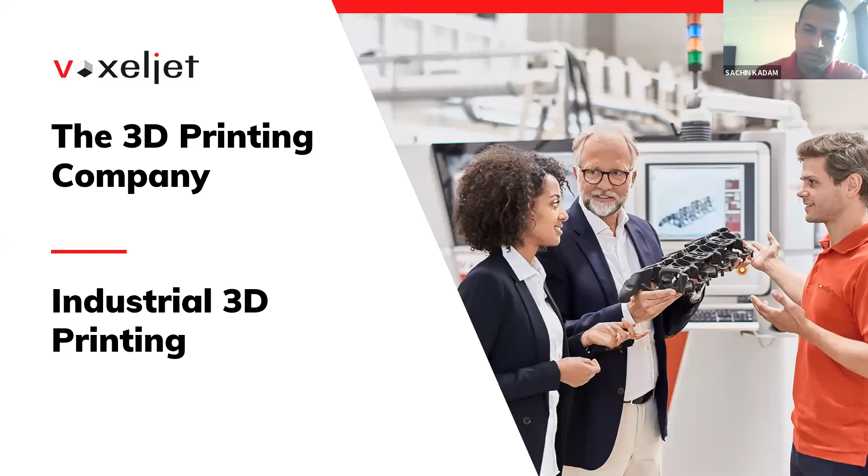We'll discuss the company today. I'll give a brief description about the company, the processes we use for different castings and different materials. We'll discuss different materials, and different systems we have for different applications. The services we provide to customers who don't have 3D printing machines and want to get our services, 3D printed parts - we print the parts for them and deliver it to them. And we'll also discuss a few interesting case studies from different customers.

So we are a 3D printing company founded in 1999. It started with 8 people, now we have more than 250 people in our company. The headquarters is in Augsburg, Germany. We also have subsidiaries in Detroit, USA, and in London, UK. We have offices in Pune, India, and in Shanghai, China.

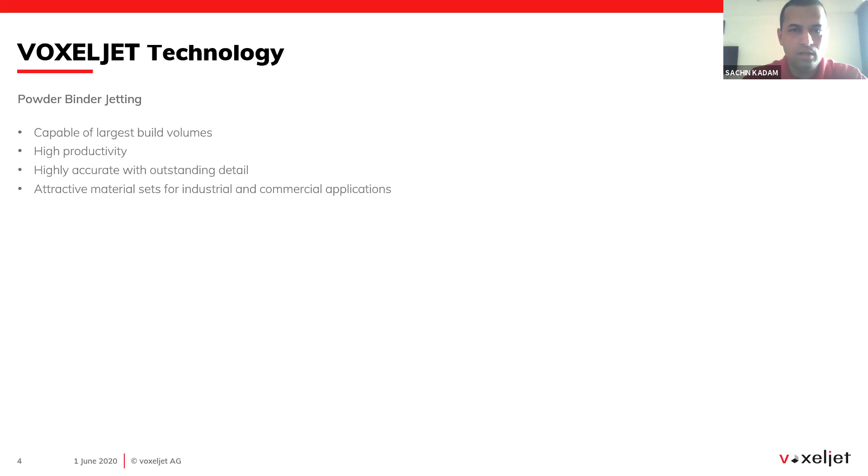The advantage of 3D printers is the printed parts are highly accurate. The tolerances are very low - the accuracy is around 0.2 to 0.4%. The details of the part are really great. We also have attractive material sets for different types of applications, including commercial applications.

Now the printing process - over the last couple of weeks you've all heard a lot about 3D printing technologies. The principle is basically the same for all 3D printers. You need CAD data first for a part, and then it is fed to the machine. The machine has a nesting software where you can slice the CAD data into 150 micron or 300 micron layers, depending on what kind of process you are using.

The CAD data is sliced, and on the machine the powder is recoated with the recoater, and after recoating the print head prints the data on the platform as per the layer data provided by the machine computer. These steps are repeated until the parts get finished. After the parts are finished, normally the job box is removed, and there is an unpacking station. We have to unpack the parts, clean the parts, and the parts are ready for further processing.

VOXELJET presents the chemical 3D printing process, powder binder jetting. The 3D printing process runs on all available VOXELJET printing systems with a variety of different particle materials, such as sand, plastics, or freely selectable powder materials.

The only requirement is CAD data of the part. The process starts with the application of the part material to the building platform by a recoater. Afterwards, the print head applies the binder selectively at the areas where the future part is to be produced, thus connecting the layers.

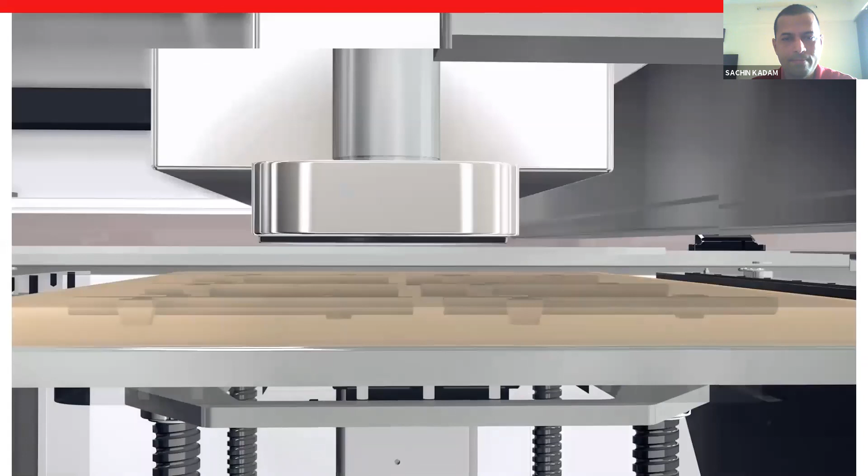After the binder has been applied, the building platform is lowered by the layer thickness. This process is repeated until the part is completely finished. The unprinted particle material is removed after the printing process. The models can be used directly for metal casting or as design and functional models without time-consuming post-processing.

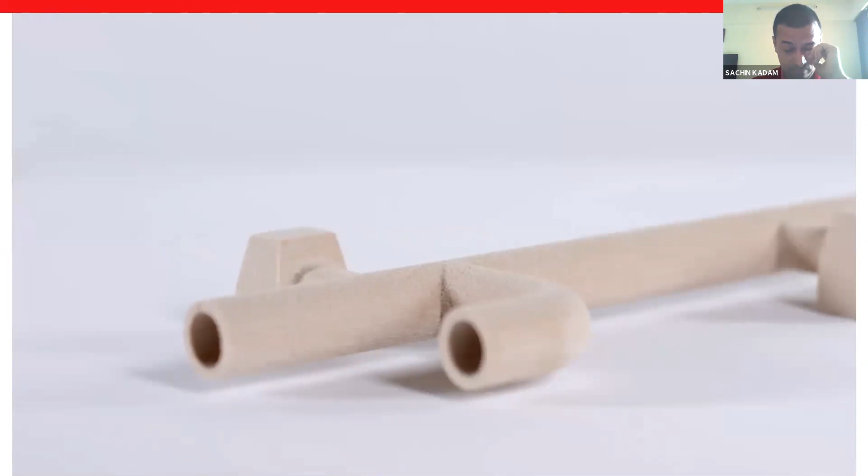We have different processes for 3D printing. One is the sand process. For the sand process, we use green sand or silica sand, where you can print the molds and cores, the negative of the pattern, and then in a foundry you can do metal casting from these parts. We have the largest industrial printer.

The build space is 4 meter by 2 meter by 1 meter. The resolution is really high, we print with 300 dpi resolution, and over 25,000 individually controllable nozzles. The printer has small nozzles from where it jets the binder.

The binder jetting technology is similar to the printers you have at offices or home, inkjet printers. It prints through these nozzles according to the CAD data provided.

Basically, like if you have a PDF file of 100 pages and you print those 100 pages on a basic office printer, similarly here the CAD data is sliced and it generates a number of pages. It's similar, like 150 micron or 300 micron layers are generated, and it generates 600, 700 layers depending on the size of the file, and then it prints layer by layer.

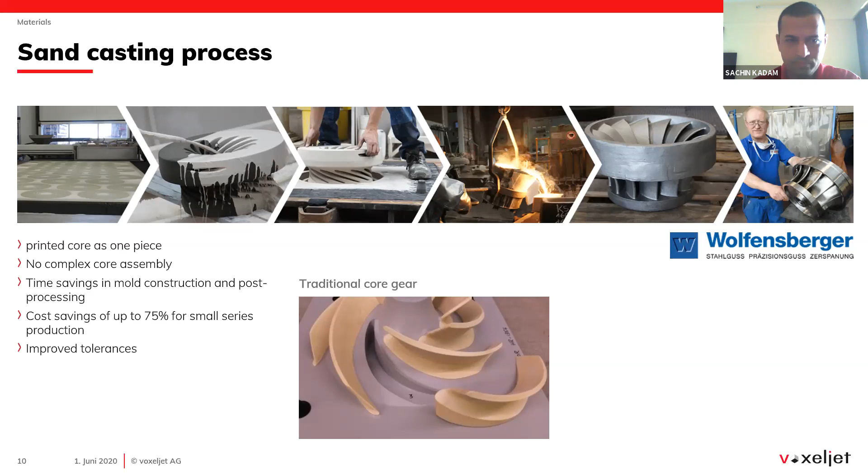So I have a short video of the sand printed part and also the casting, which is shown in this video.

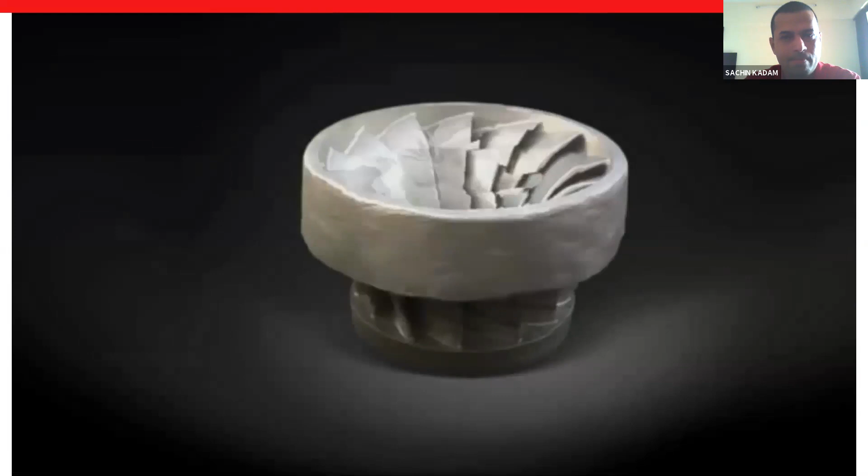VOXELJET offers the manufacture of complex molds using 3D printing. The core of a wheel and its undercuts can now be easily produced in one piece. On request, we can take over the production of the sand mold design based on your 3D data. Depending on the application, prototypes and small series can easily be produced in various sand types.

The recoater applies sand to the 4-meter-long build space in one layer. At the same time, the printhead starts to selectively dose the resin where the mold will be created. This layer building method allows for the production of complex geometries with undercuts in one piece.

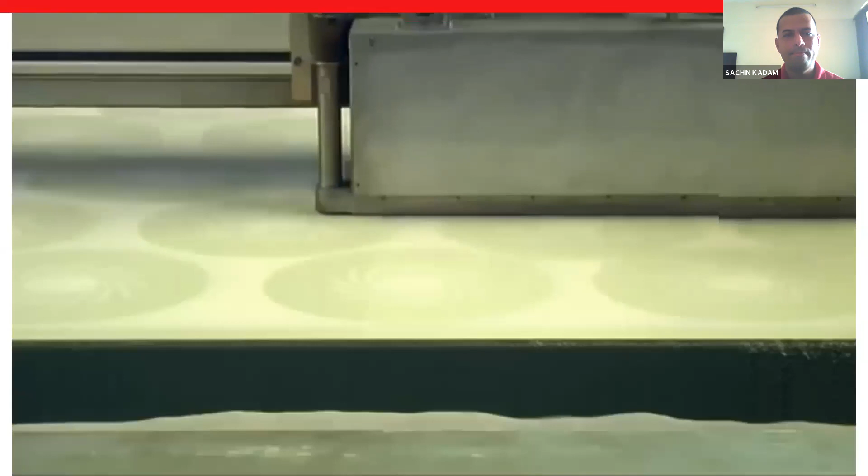After the build process is complete, the mold can be easily unpacked. The handling of the mold in the foundry is the same as with conventional production methods. The unbound sand can be easily removed, and the molds are ready for immediate casting. Because of the different delivery periods, you can coordinate the molds to your production.

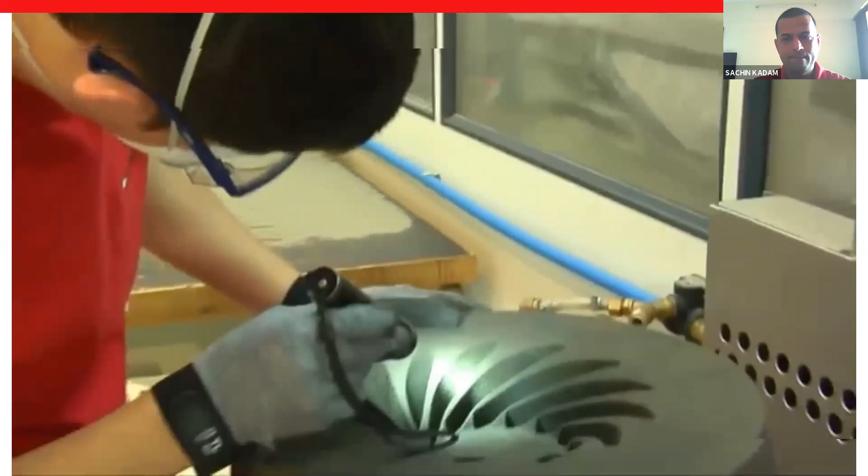The VOXELJET 3D printing process allows for the cost-effective and time-saving manufacture of your components at a high degree of precision. The Wolfensberger Steel Foundry and VOXELJET manufacture a complex wheel using a combination of traditional mold construction and modern 3D printing.

The external shape of the prototype is made in a conventional manner using existing models. No models are built for the core. It is delivered by VOXELJET on a just-in-time basis and is then integrated and processed in line with the normal work process. Assembly involves just one core rather than multiple core segments.

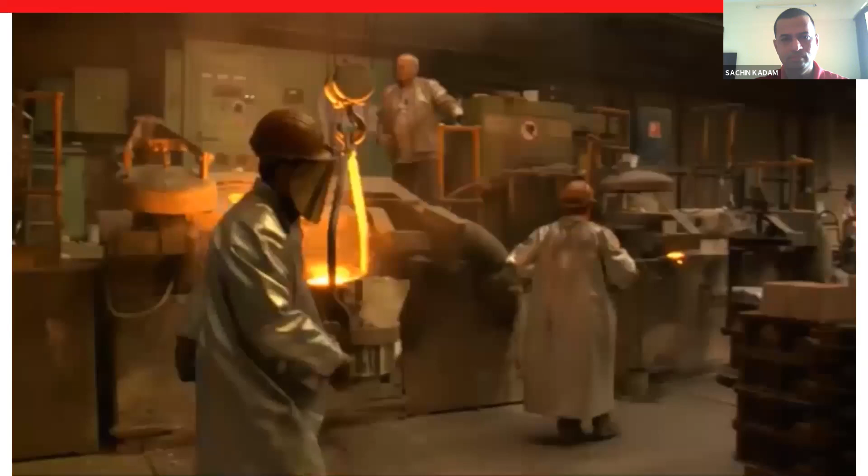The client can choose from suitable sand varieties for the various cast alloys. The cast features the typical foundry properties and can be optimized through the use of cores printed with the 3D method. The cast can be removed from the mold in the usual manner.

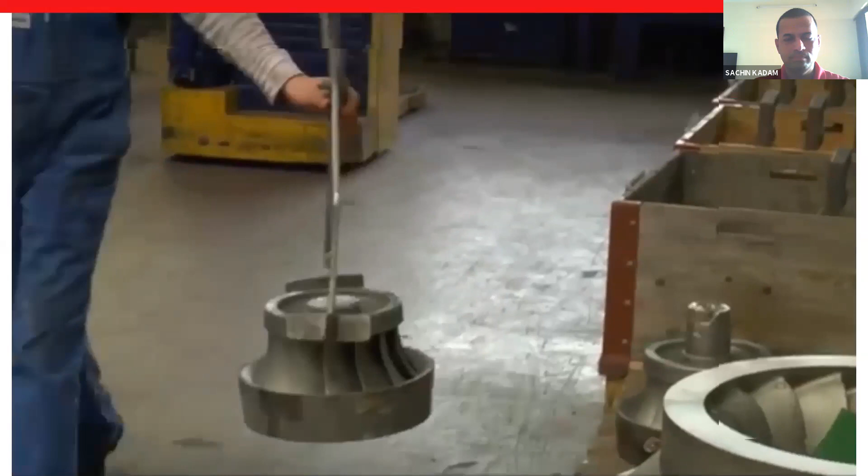A smaller number of core flashes and an excellent surface make for quick and cost-effective cleaning of cast parts. The cast part then undergoes the usual quality checks, such as X-rays, color penetration testing, or ultrasound. The result is a complex wheel that impresses with its component accuracy and consistency in form.

So as you saw in the video, they printed the core from the VOXELJET and made a mold from the conventional method, and then we'll see the material we use for sand processing.

So normally we use silica sand for 90-95% of the mold making in industries. There are different types of sand with different grain sizes, and it depends upon how much surface quality you want. You can select the sand.

So these are the materials we use: GS14, GS19, GS25. All these sands are supplied by Strobel. We have a tie-up with Strobel, so they supply these sands to the customer also.

And with the sand, we have a layer thickness of 300 micrometers. We get the strength of 220 Newtons per centimeter square. So different sands are used for different applications.

So another process we have is the PMMA 3D printing process. PMMA is a polymer material, and it is basically used for investment casting of parts.

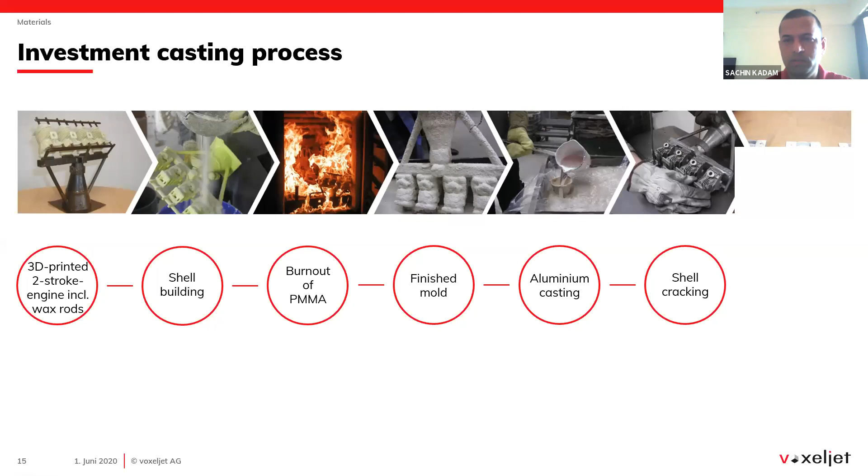Then we do the shell building with ceramic coating, and we burn out the PMMA parts. After burnout, we make the casting. We pour the molten metal, and after that, shell cracking to take out the parts, and the further processing can be done.

So I have a short video of this also for the investment casting process.

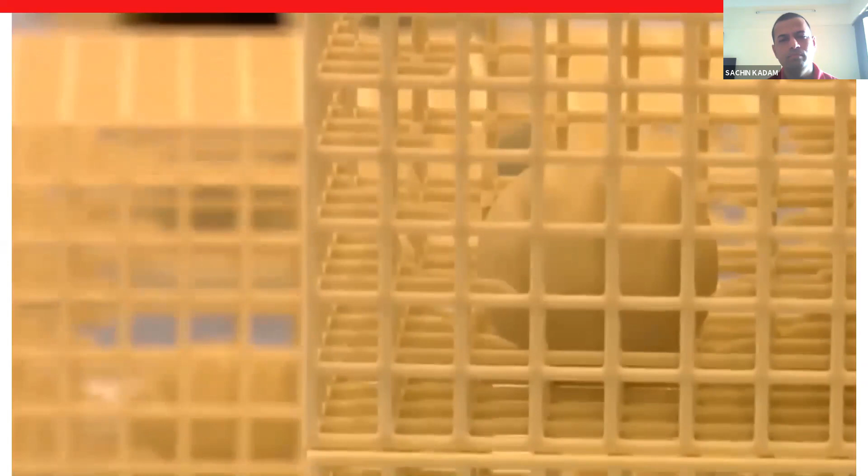VOXELJET can manufacture complex plastic parts using a 3D printing process. It consists of a powder-based process that can be used to create investment casting and illustrative models measuring up to 1060 by 600 by 500 millimeters.

When your CAD data is received, it is checked and prepared for the process. Geometries can be changed at any time, as this process does not use any tools.

The printing process begins when the recoater applies the PMMA powder to the build space in 100 to 150 micrometer layers. At the same time, the printer head selectively doses the binder at the points at which the model is created. The 3D printer's vertical build speed can reach up to 18 millimeters per hour.

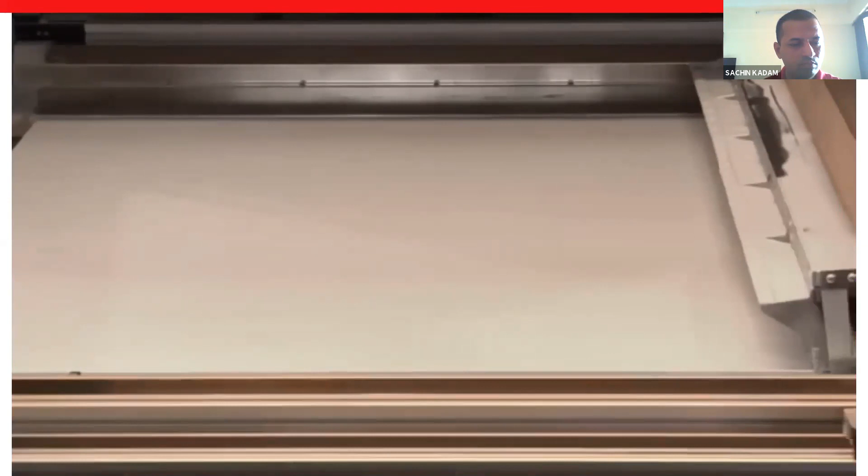This layer building method makes it easy to manufacture complex geometries with undercuts in one piece. After the printing process is complete, the models remain in the box for several hours for hardening. Then the plastic part can be unpacked.

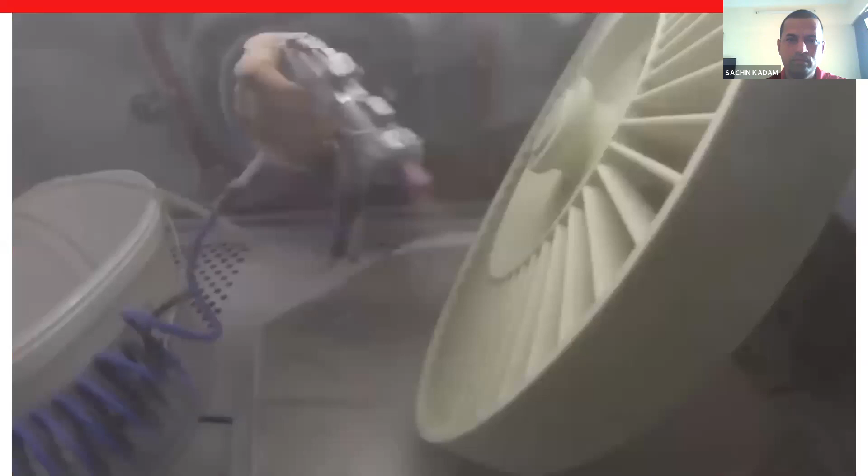The unprinted powder, 100% of which can be reused, is removed with an industrial vacuum and compressed air. The molds are characterized by maximum detail accuracy and precision. They reach their final strength in the furnace.

For investment casting, the models are briefly immersed in wax to seal and smooth the surface. Design models are infiltrated with epoxy resin for added strength. The models are packaged carefully to ensure safe delivery to the customer.

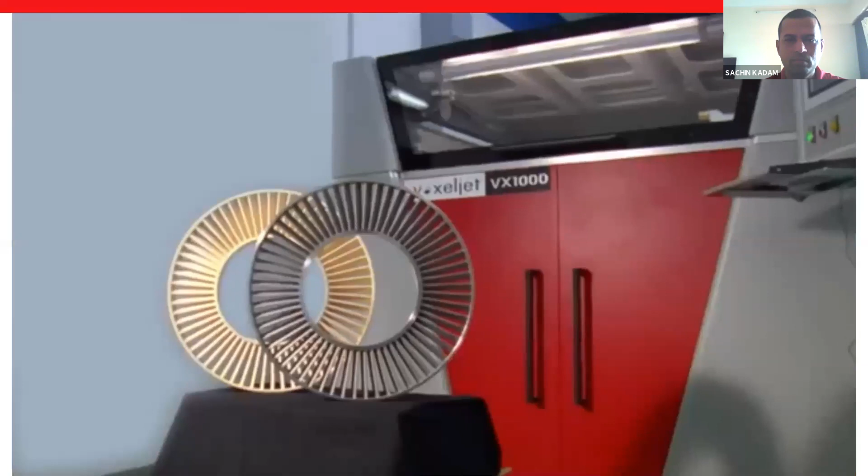The wax-infiltrated models are processed the same way as wax models. The conventional production of complex components such as wheels is very cumbersome and expensive.

VOXELJET's 3D printed plastic models provide a cost-effective way of producing installation-ready cast parts using the investment casting process, as is the case here at stainless steel expert Schmolz + Bickenbach. This wheel has a diameter of 500 millimeters. However, the VOXELJET 3D printers can also produce components up to 1 meter in length and a total volume of 320 liters. The gating and feed system is mounted after inspection.

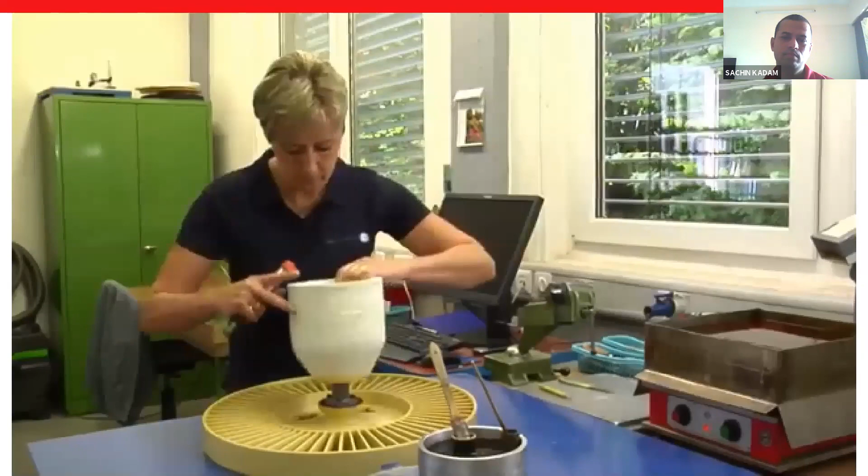The finishing process is the same as for conventional wax models. The first ceramic coatings are applied manually, while subsequent layers are added by a robot. The plastic models soften at 80 degrees C and shrink, so that tears cannot form in the ceramic shell. Finally, the 3D printed model is burnt out from the casting die in the kiln. The plastic models burn out with virtually no residue.

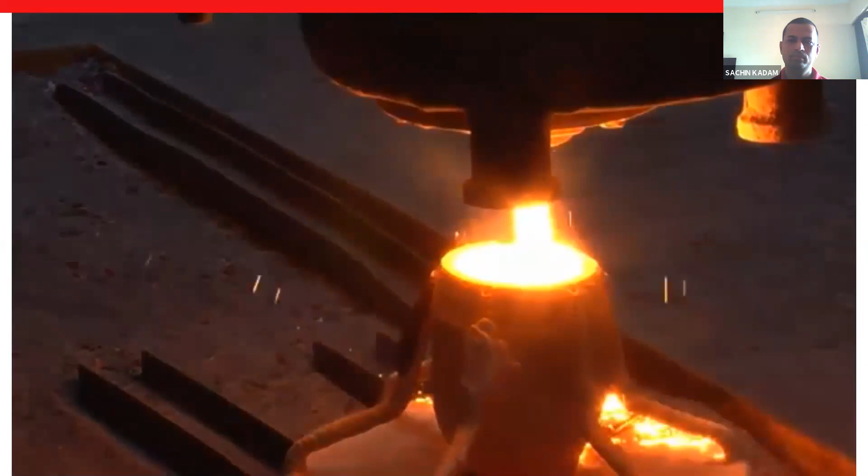Now the liquid steel, which is around 1600 degrees C, can be poured into the heated casting dies. The castings are removed once the molds have cooled. Once the casting is complete, gating and feeding systems are removed, sharp corners are deburred, and unwanted surface errors are repaired.

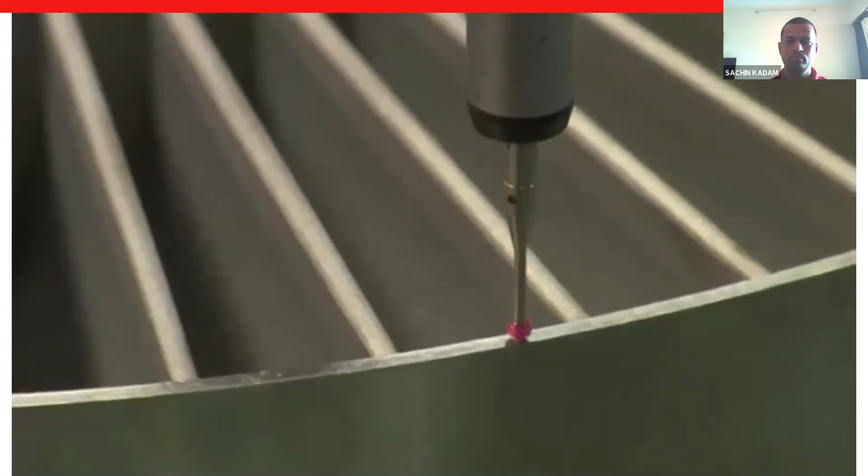This process is followed by non-destructive tests and size inspections in accordance with customer specifications. Whether for prototyping, individual piece, or small series manufacture, additive manufacturing can produce highly complex designs and investment casting models within a very short period of time.

Okay, so that video explains a lot of things. So normally after the printed parts, we do wax coating, because we need to get a good surface finish, and also it avoids the shrinkage of the parts.

For the plastic or PMMA process, we use different types of material, the powders, Polypor B, Polypor C, for different applications. It has different surface finishes and different strengths, and these can be easily burned out at 700 degrees Celsius for the investment casting. So for the plastic, normally the layer thickness for the printing is 150 micron, and the resolution is very high, up to 600 dpi.

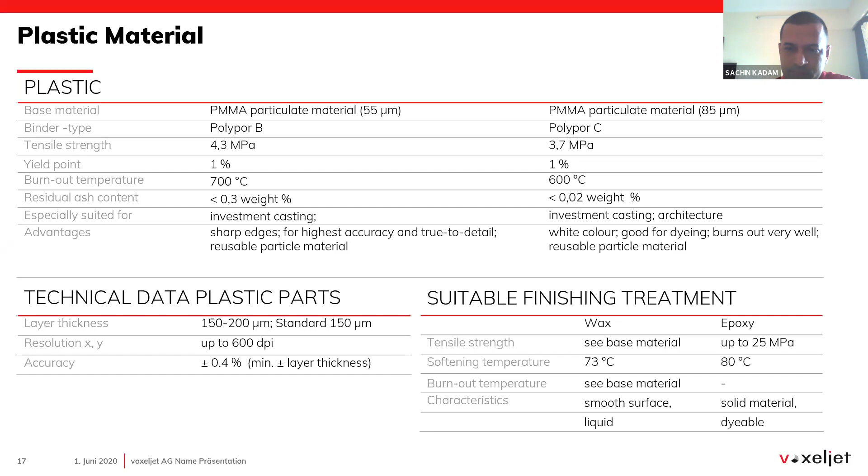So the next process is HSS, high-speed sintering process. It is similar to the SLS process, selective laser sintering, and the parts can be used for end use. The process works similarly. The only difference is here we use ink and the IR lamp for the fusion.

The surface can be heated up to 100 degrees Celsius for the fusion. So the recoater lays the powder, and the printhead jets the ink, and with the IR lamp or the heating system, the fusion takes place. This is a flexible and open source system, so anyone having different kinds of materials can use these systems.

So I have the video for this also.

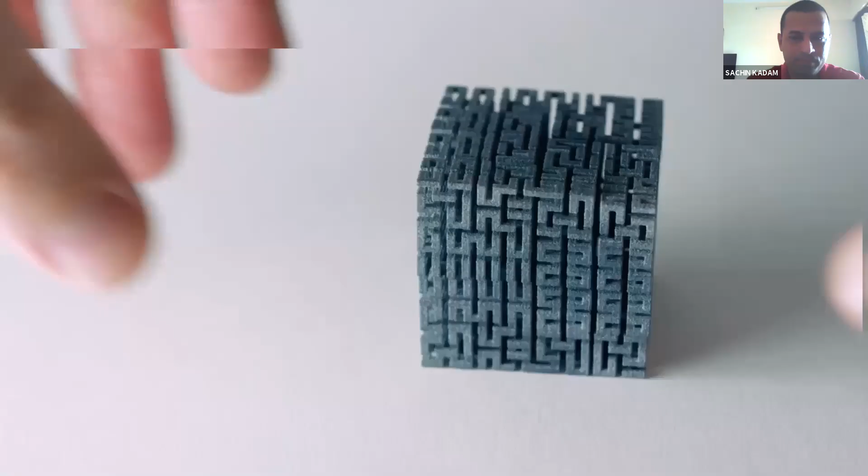Introducing high-speed sintering, the 3D printing process by VOXELJET. High-speed sintering, or HSS, opens up a completely new dimension of functionality and flexibility for our customers. The benefit of our industrial inkjet technology is that it offers highly accurate build rates, consistent layer timing, and efficient build times. HSS is a physical process.

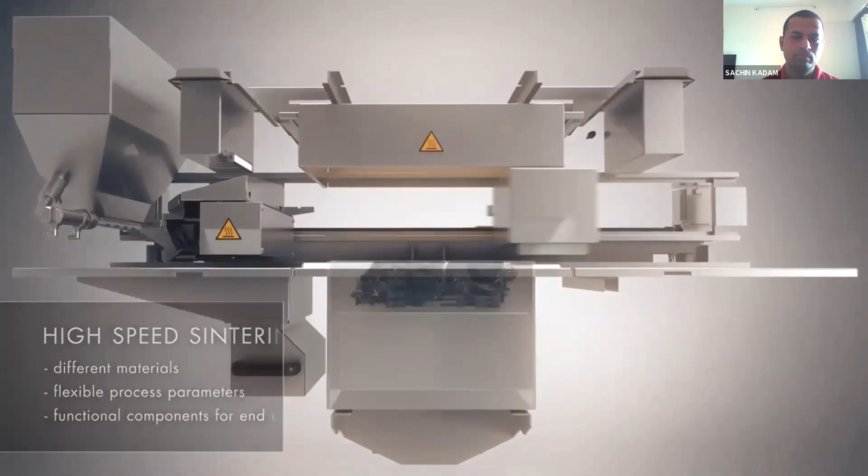It involves depositing a fine layer of loose powder onto a build platform, after which an inkjet printhead selectively deposits an infrared-absorbing fluid directly onto the powder surface where sintering is desired. The build area is then illuminated with infrared light, causing the printed fluid to absorb the energy and fuse the underlying powder. This process is repeated layer by layer until the build is complete.

This process offers the user flexibility to individually adapt the process parameters to specific materials. With this process, complex illustrative and functional models are created using different plastic materials such as PA12 or TPU. HSS offers enormous benefits in terms of productivity, flexibility, and applicability of components. Thus, it introduces a huge variety of diverse applications. We can manufacture functional parts, but also test components and prototypes with outstanding properties and quality.

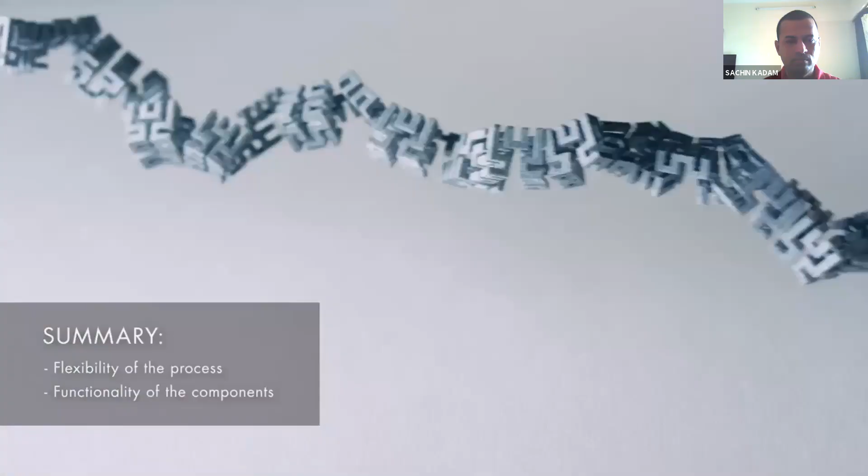We are constantly streamlining our printing processes, allowing the user to benefit from faster prototyping and turnaround times. The HSS process enables the efficient and flexible production of components from different materials. It is particularly suitable for functional components with high demand of resolution and strength. Contact us here at VOXELJET to see how we can optimize your production.

So you have seen with this process we can produce a fabric kind of material also, which is very flexible. It is also possible to print different degrees of hardness with different ink inputs.

Right now we have this process available with the VX200 system, which is the smallest system we have, which is of size 300 by 200 by 150 mm. So you can print 9 liters of volume. The grain size for this process varies from 55 micron to 1 mm. The layer thickness basically is 80 to 100 micron.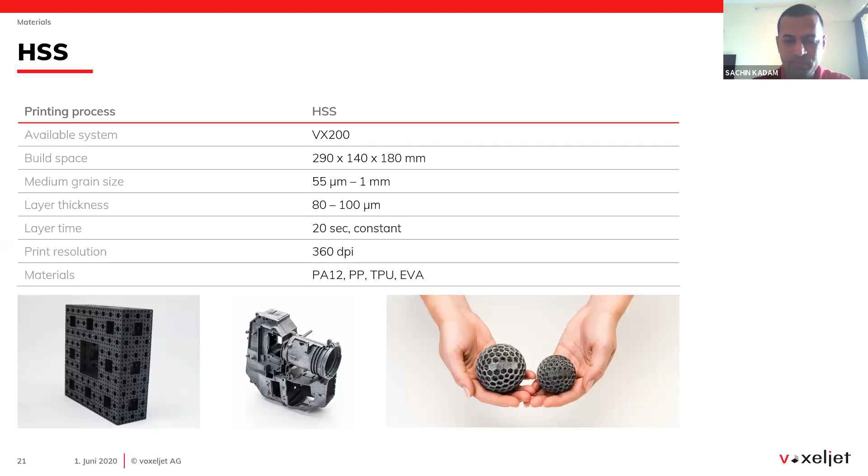Resolution is 360 dpi. Layer time is 20 seconds, and the materials are different materials like PA12, PP, TPU. That is polypropylene material, and it can be used directly as end use parts.

We have different systems for different applications. The biggest system is VX4000. The size is 4 meter by 2 meter by 1 meter build size, and it is basically used for sand process. The VX2000 is also basically used for sand process.

It has a size of 2 meter by 1 meter by 1 meter. The VX1300X is a new system, still in development, and it is also basically used for the sand process.

VX1000 machine can be used for sand, also for plastic parts. The size is 1000 by 600 by 500, so it builds around 300 liters of volume. VX500 has a volume of 500mm by 400mm by 300mm.

VX1000 and VX500 are the most popular machines among customers because they give flexibility to print small to large parts. So that's the most popular.

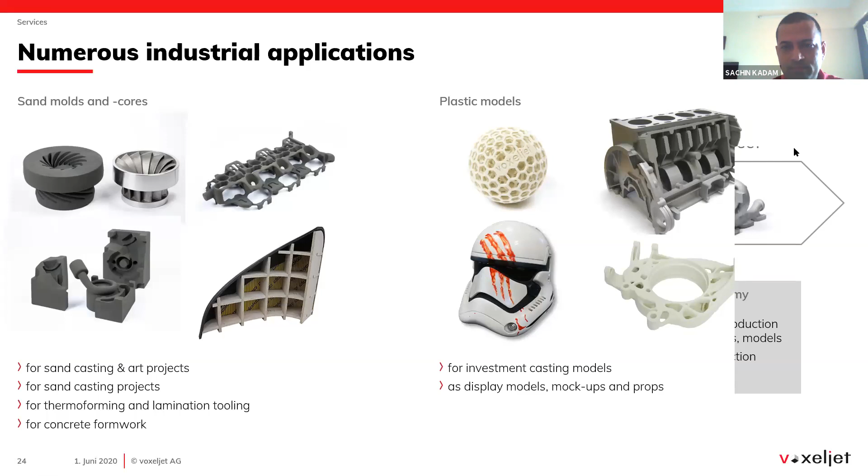Numerous industrial applications like sand molds and cores, manifolds, water jacket cores, formwork for concrete, and plastic models for arts and architecture designs, for props used in films, and plastic models for different applications.

So we can produce automotive parts like manifolds, engine blocks, gearboxes, water jacket cores, mechanical engineering designs, gearboxes, impellers, art and architecture, as shown in the picture.

You can print bigger parts in different pieces and join them together to make a huge structure out of it. That is possible. So, we will see some case studies from the customers.

So with 3D printing, first they scan the complete engine block, make the CAD model, and then produce the part with 3D printing. The 3D printing was the only option they had, because of the cost and time, and the flexibility to print complex geometries.

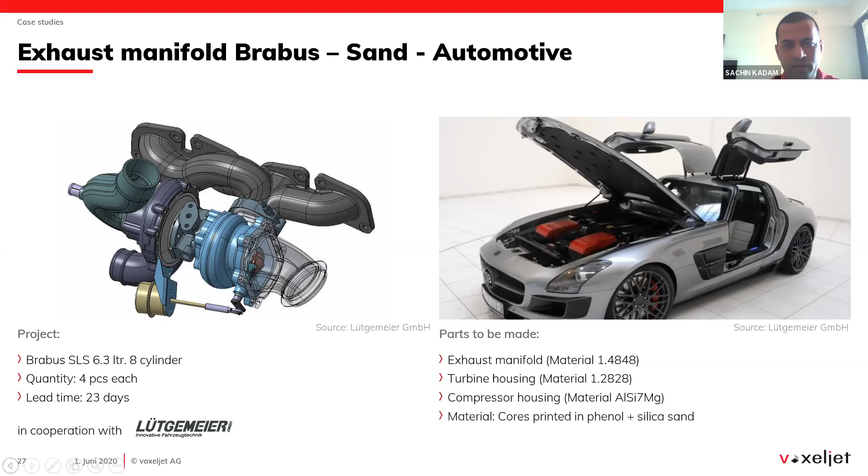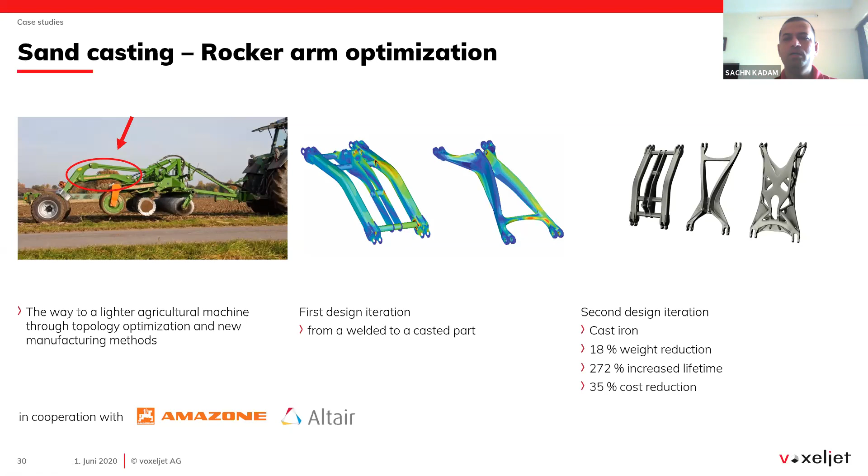So if you see, the welded parts weighed 245 kg, and the total welding length was 16.5 meters. If we compare the cast parts, the casting weight was reduced by 20 kg, almost 10%. And the lifetime, the strength, was increased almost 3 times.

So the middle one was the first iteration, and the last one was a further optimization of the swing arm. After further optimization, the weight of the swing arm got reduced further by 10%, and the lifetime again increased, again 3 times more than the conventional method. And also the advantage is time to market, since with 3D printing it's very fast to produce the parts.

So this is one of the case studies for agriculture machines. These are the pictures of how they did the casting process. It's a huge part.

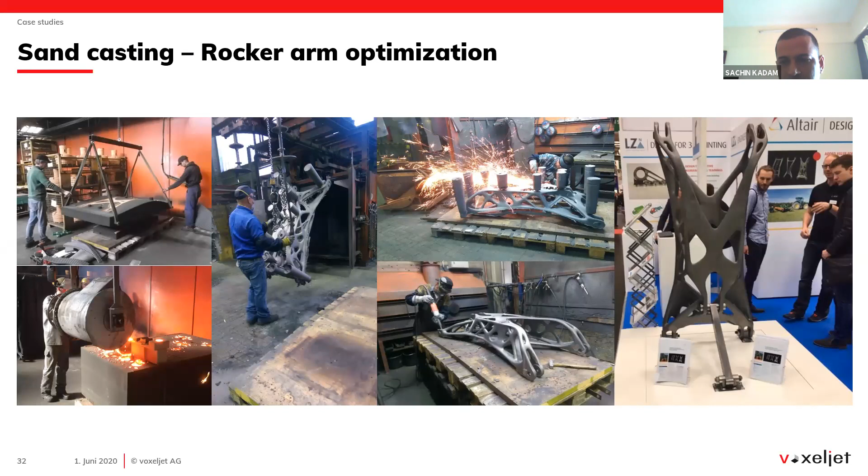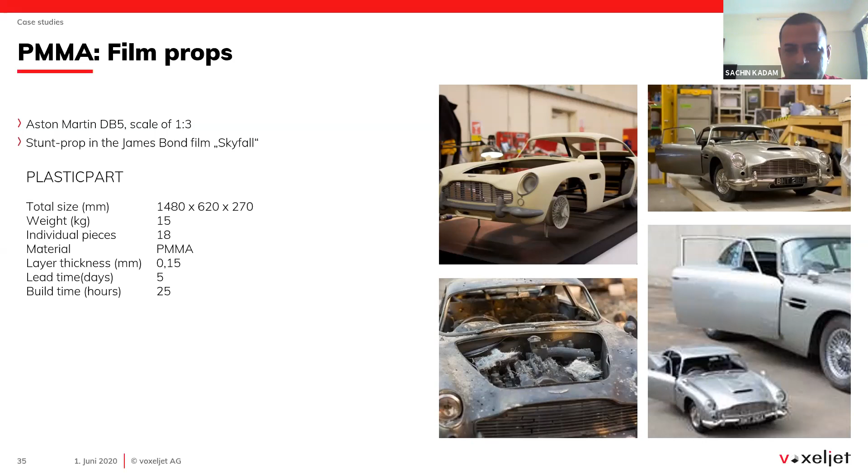The lead time for producing this was 5 days, and the build time on the 3D printer itself was just 25 hours — in 5 days the prototype was ready.

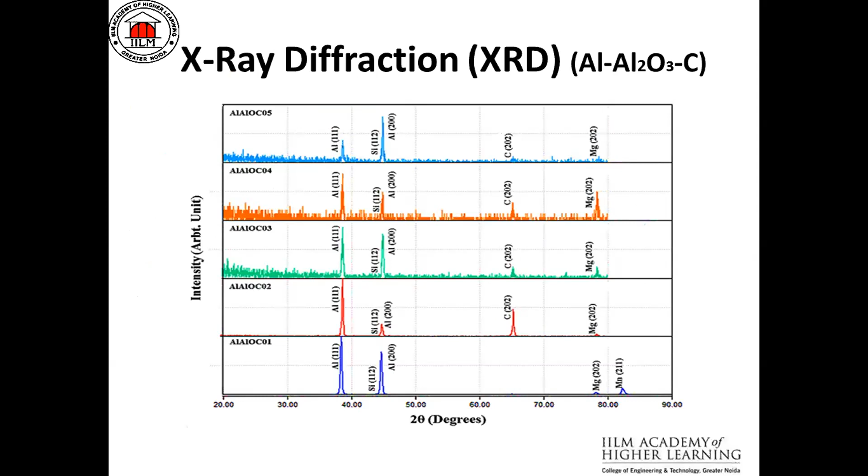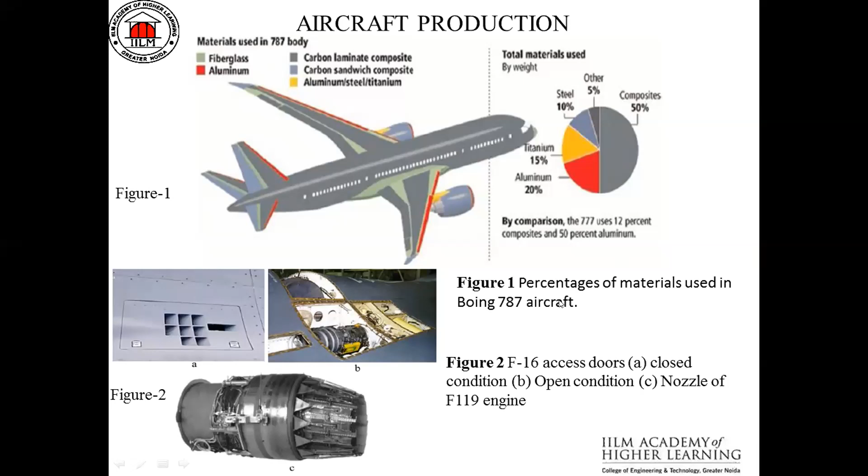In carbon fiber reinforced plastic, we use carbon fiber as a reinforcement and plastic as a matrix. So combining both these things, plastic and carbon fibers, we prepare a carbon fiber reinforced plastic.

Now the second one is Laybrick. Laybrick is a 3D printing material that gives parts the look and feel of gray stone while retaining the resiliency of plastic, making it ideal for landscape and architectural design.

Next one is Laywood D3. Laywood D3 is a wood-like 3D printer material that gives 3D printed objects the look and feel of fiberboard. It also imbues parts with other wood-like attributes, such as the ability to be cut, painted, and sanded. Laywood D3 is made from a combination of recycled wood particles.

Now, the last one is LayCeramics. LayCeramics filament is exactly what it sounds like, a clay engineered for 3D printers that can be used to make ceramic objects. LayCeramic has all the capabilities of normal clay, including the ability to be fired to give it a nice glossy look and increase strength.

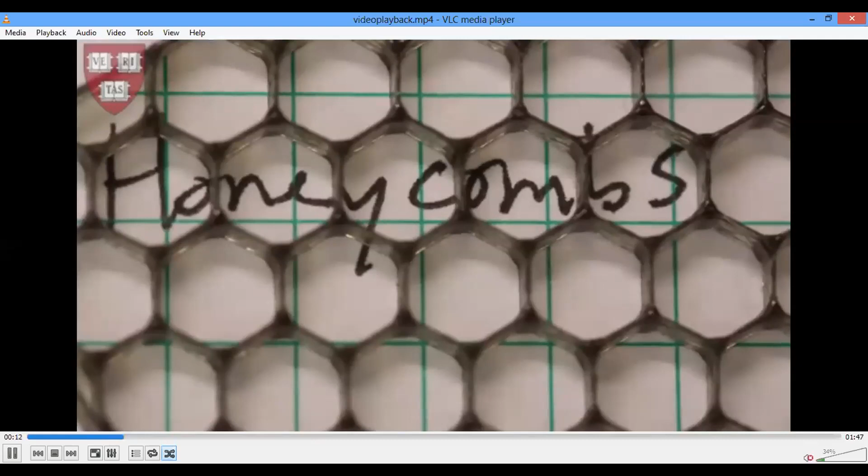So here you see, this is the paste, cellulose composite का paste है। वो needles जैसा होता है, उसमें fill करके आप paper जैसे ऑब्जेक्ट पर put कर सकते हो। यहाँ 3D printer है, उसमें paste insert करा गया है और उसका यूज़ करा गया है for making a particular object। जो भी डिज़ाइनिंग है वो प्रोग्रामिंग पर डिपेंड करती है।

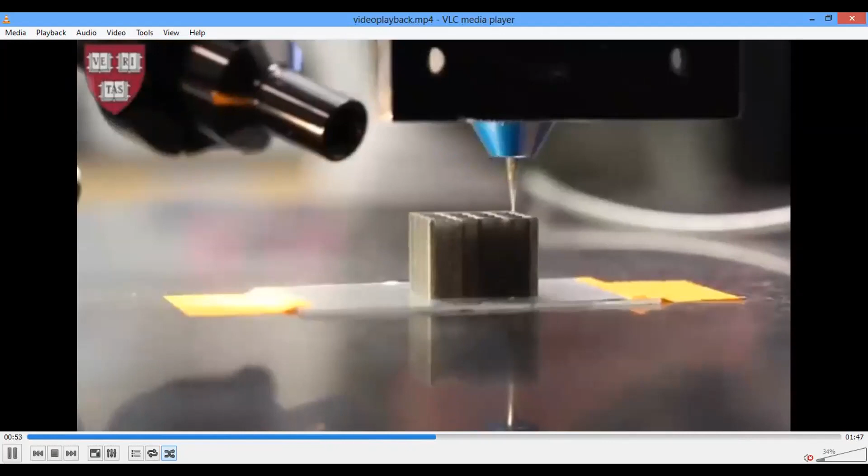जैसे ही आप प्रोग्रामिंग करोगे वैसे डिज़ाइनिंग मिल जाएगी और उस टाइप का सैंपल प्रिपेयर हो जाएगा। आपका फिलामेंट एक तरह से पेस्ट है, नॉट ए हार्ड वायर। वो सिंपल पेस्ट प्रिपेयर करा गया और उस पेस्ट की हेल्प से मटेरियल बना। जैसे कंस्ट्रक्शन में सीमेंट कंक्रीट से स्लैरी प्रिपेयर होती है और उसकी हेल्प से वॉल बनती है, वैसे ही यहाँ पेस्ट बन जाता है और वो 3D प्रिंटर के थ्रू प्रोग्रामिंग के थ्रू यूज़ हो रहा है और ऑब्जेक्ट प्रिपेयर हो रहा है।

So this is a technique which is used in a 3D printer for a composite material. And here the composite materials are cellulose composites.

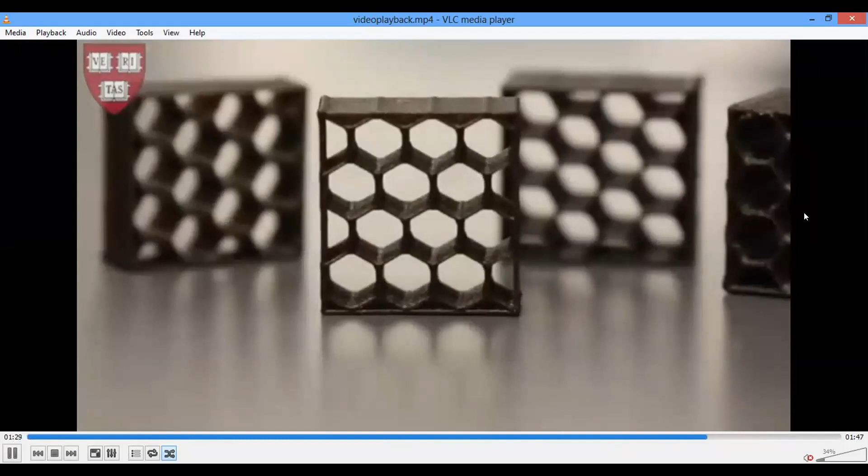Now, after this video, I want to share a video which prepares the filaments. This is the cellulose composites. Now, I have shared again.

My name is Joshua Smith. I'm with MakerGeeks.com, and we sell 3D printers, 3D printer filament, and do manufacturing here in Springfield, Missouri.

Well, I started manufacturing our own filament. There wasn't really a quality control issue, there wasn't really even a price point issue. It was just the fact that we were buying everything from China, as is everyone else in the world, and we thought we could do it ourselves.

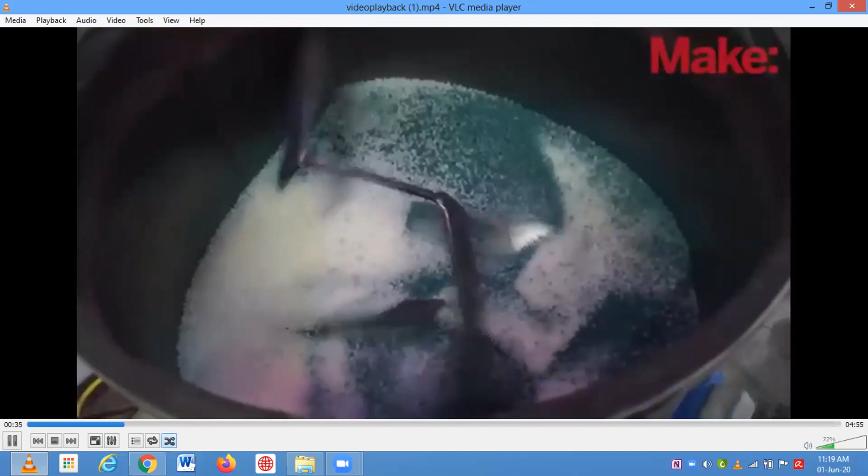So making filament step by step, you start with a raw resin, PLA, ABS, whatever it is. It's usually granulated. The resin is always either clear or white, it doesn't come colored. You put it into a blender if you're going to mix a pigment or an additive with it. The additive could be anything from a structural integrity type additive that might give it more strength or impact resistance, to magnetic properties, or just color. So if you want blue, you add blue pigment to the resin. Turn the blender on, it blends, and now you have blue resin.

So from there it goes into a drying process, usually about a 2-hour dry at anywhere from 60 Celsius to 80 Celsius. This is really important. It's kind of the one part that you can skip if you're trying to make filament really quickly, and I think that's why people get filament that pops on them or jams on them - because they didn't take the time to dry it.

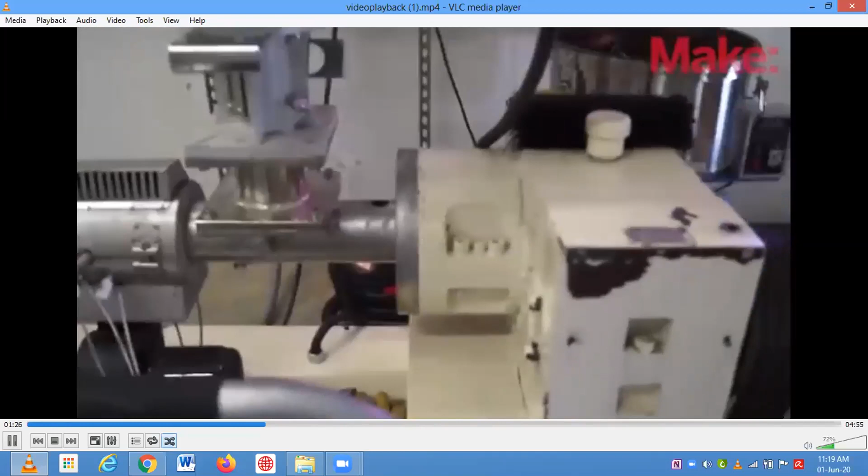Then it goes into a single screw extruder, which is probably one of the most common manufacturing tools in the world. So once it comes out of the single screw extruder, which is where it's heated and mixed and extruded into a solid monofilament, then it goes into a warm or hot water tank, which gently cools it, and that's how you get round filament.

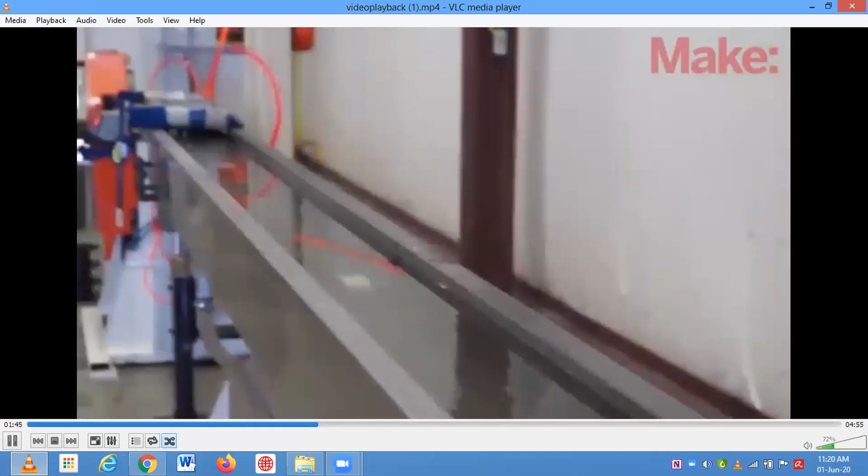If you ever have oval filament, the reason you have oval filament is because they had their water temperature at the wrong temperature for whatever they were running. So if you have your hot water temperature set right, and your nozzle temperature set right, and the resin set right at the right temperatures, you come out with perfectly round filament. So from there it goes into a cold water tank and it runs through that for maybe 20 or 30 feet, and then it starts getting wound and put onto a spool.

So the way that you get either the 1.75 or the 3 mil or the 2.85 - I thought it would be a different die that would come out at a different size, but it's actually not. It's a tractor system, and it pulls that filament out of the extruder nozzle at a constant pressure. So if you want 1.75, you pull faster. If you want 2.85, you pull slower, and that's going to make that filament smaller or bigger. So how you control the tractor system is how the diameter comes off the machine.

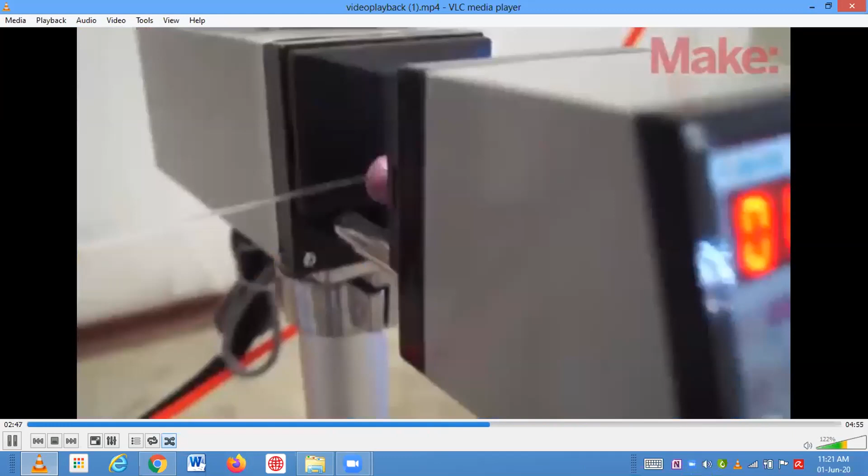So if you have a consistent diameter, then you know you have your process right. We have a laser gauge that it goes through in real time that monitors that. So if I start seeing that jump up and jump around, I can pull the filament off and fix whatever the problem is. But as long as that's running right on, you know your process is right.

So this is another reason we kind of know we're the only ones doing it. This is a major manufacturer of these extruders, and they couldn't get visas to come over, so nobody came to train.

So it shows up, takes up that whole space. I put it together, assembled it, wired it. It's an odd thing to Google because it's like this void of information, because people are doing it but just don't talk about it - like people build jet engines, but Boeing doesn't blog about it. People are doing this in China, but they're doing it at $100 million levels. They don't blog about it. So it's like that thing you've got to figure out.

And it really is the temperature - there's 4 zones in the extruder. Each zone has to be the exact right temperature, in the right sequence, for the speed and the traction speed. And then each water tank has to be exact. It's that precise. It's just been this constant battle of prayer, and then you get an answer, and you go back and change something, and then you're sitting at home and it's like, oh yeah, that's the answer - you go back and try it.

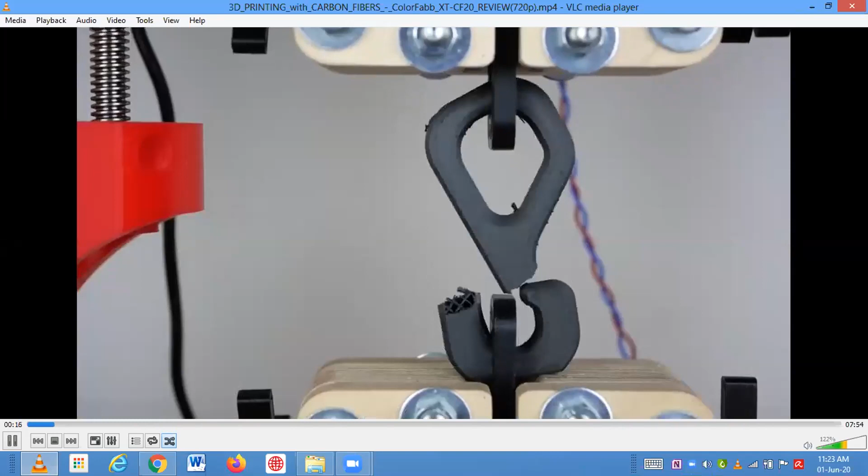Okay, now another video about 3D printing with the help of carbon fiber. This roll of ColorFabb XT-CF20 has been sitting untouched on my shelf for over a year now. I finally found the time to put this carbon fiber filled material through its paces. This week, we'll be looking at print quality, mechanical strength, and temperature performance of this more exotic material, and I'll also talk about some safety concerns.

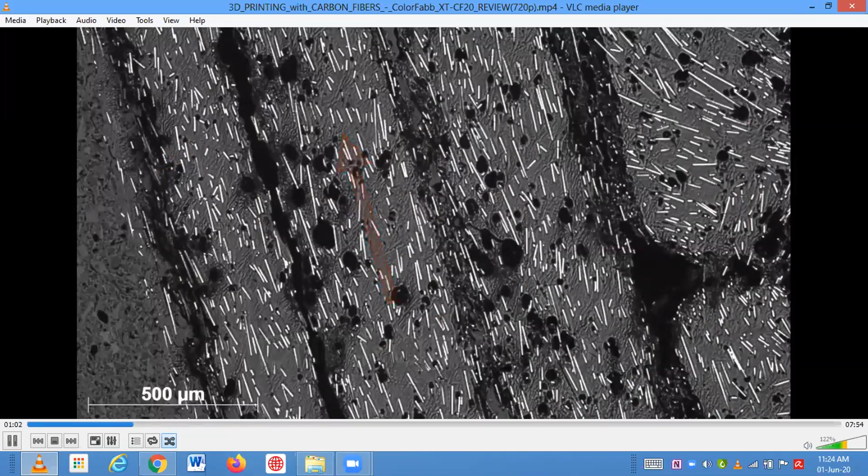When printing this kind of filled material, it's very important to use abrasion-resistant nozzles, because otherwise the inside of your hot end will erode away in no time. I used a hardened steel 0.4mm nozzle from E3D, which is capable of handling this task. Tungsten or ruby nozzles are also an option, but never ever print reinforced filaments with brass or stainless steel nozzles.

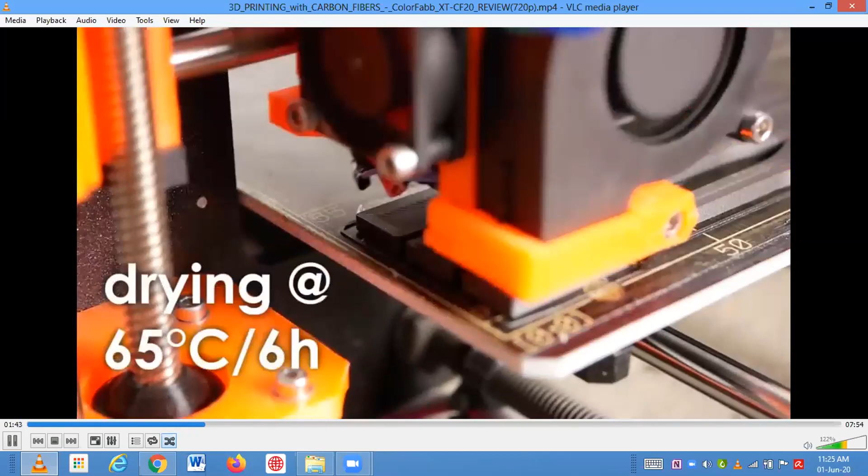Usually I print my whole set of test samples and then analyze them. Unfortunately, I noticed after the first run that the printed parts showed quite a lot of porosity, probably due to moisture, so I dried the roll of filament in my oven at 65 degrees Celsius for around 6 hours and reprinted all of the material test samples. This filament test ended up being way more effort than I anticipated. The first thing I noticed was that instead of an extrusion factor of 100%, I now needed to increase it significantly to 113% to get good prints.

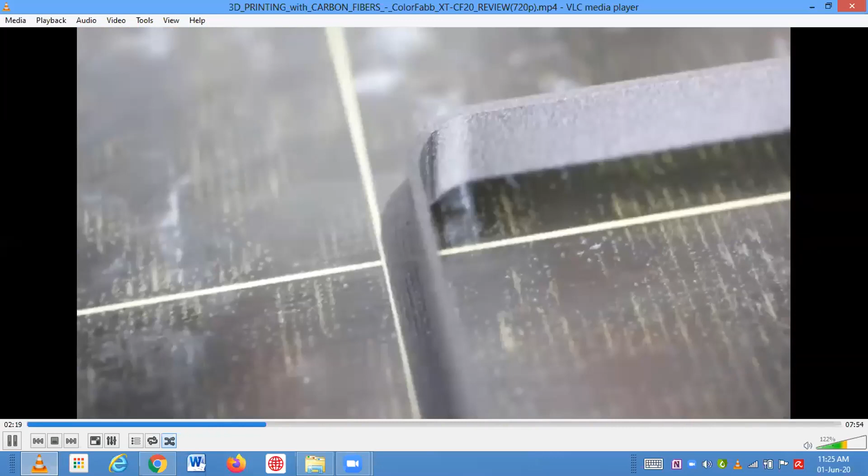I printed all of the parts as always on my original Prusa Mark IIs, where I added some Magigoo on the 70-degree bed and didn't have any warping or first layer adhesion problems as soon as the first layer thickness was set correctly. I tried fan speeds between 0 and 100%, where starting at 25%, the overhanging parts of the prints looked very nice. In the end, I settled with 35% fan for the rest of the samples.

I tried nozzle temperatures between 230 and 270 degrees Celsius, which all worked fine, though 250 degrees looked the best and had proper layer adhesion, so this was the temperature I used for the rest of the samples.

Since the material is a copolyester, I had some issues with bits of material sticking to the nozzle and the heat block, which let loose from time to time and ended up on my parts.

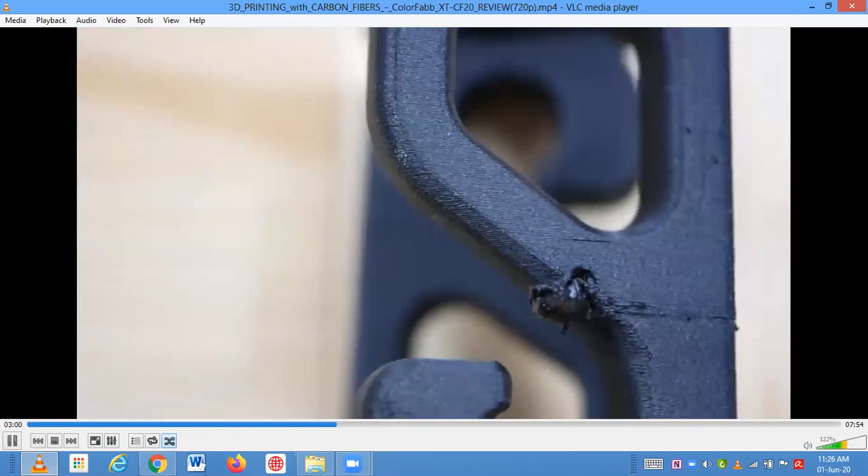Overhangs printed great up to 65 degrees, and look at these outer surfaces. The matte look gives these parts a finish I haven't seen so far with any other material.

The material doesn't string, but left some nasty material blobs at the stringing test, though fine details came out well. Playing around with retraction settings and using dried material would probably increase the quality.

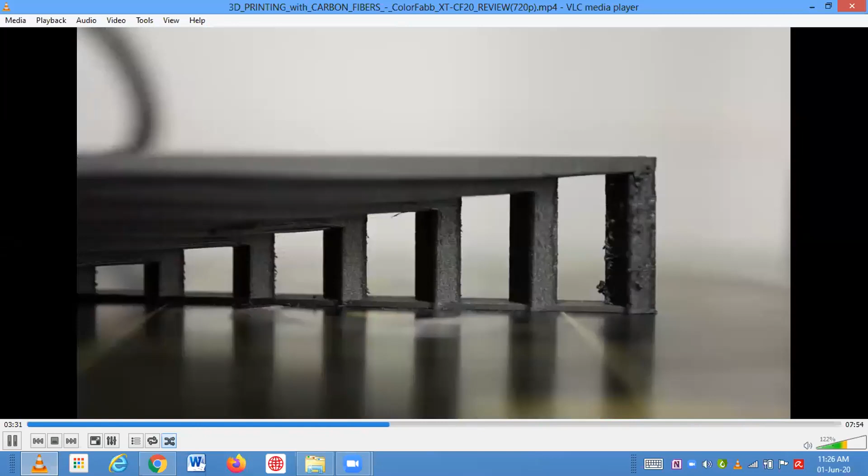Bridging was strange, because at first the part looked really awful. Out of curiosity, I used Slic3r Prusa Edition instead of Simplify 3D, which made such a difference. Almost perfect bridging, even at the largest gap.

I tried to tune the settings in Simplify 3D, but nothing I did improved the print quality, which is really strange. The 3D Benchy reflects these results because it showed blobs at the retraction points and some material bits at a couple of places. Still, if you overlook these, the rest of the boat looks stunning with the matte black finish.

Let's now take a look at the material properties of ColorFabb XT-CF20.

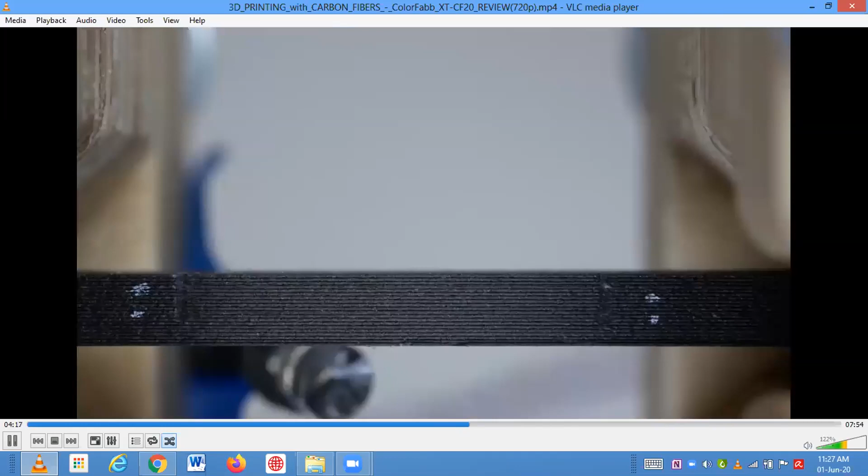The tensile strength of around 45 megapascals before drying wasn't very impressive, even lower than regular unfilled PETG. After drying the material, it improved more than 20% and ended up with 55 megapascals, which is better but still below regular. Layer adhesion was only okay, and the specimens printed standing failed at 18 megapascals, which is only a third of the strength of the lying specimens.

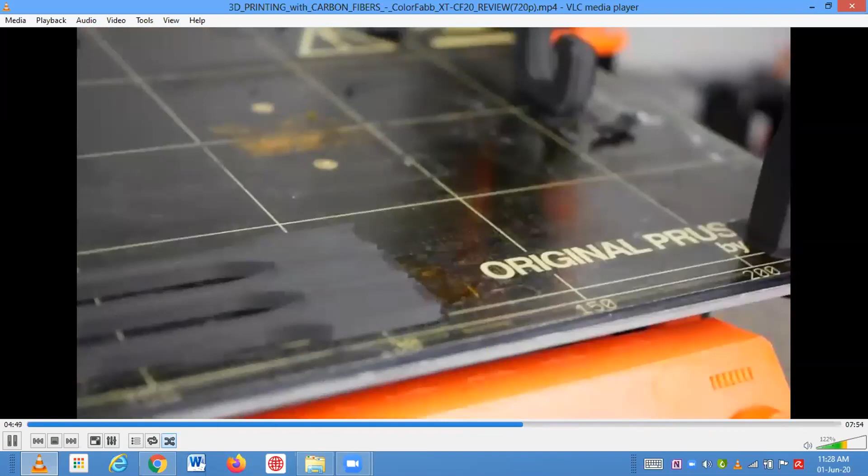The tensile modulus, the stiffness of the material, is what really stands out, because with almost 3000 megapascals it is the most rigid material I've printed so far. This is the first time I also tested the stiffness perpendicular to the printing direction, with the upright specimens.

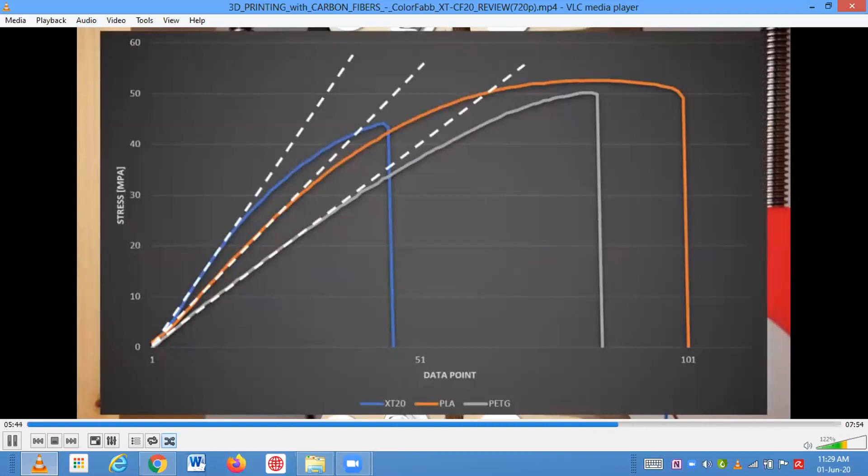My test hooks failed at around 50 kilograms of load, which is in the mid-range. The standing one was only able to bear 16 kilograms until failure, which confirms the previous tests. Temperature resistance was good and the material stayed rigid up to 80 degrees, then totally failed at 85 degrees Celsius. The impact strength was okay, an improvement over regular PETG or PLA, but far from the toughness of, for example, polycarbonate.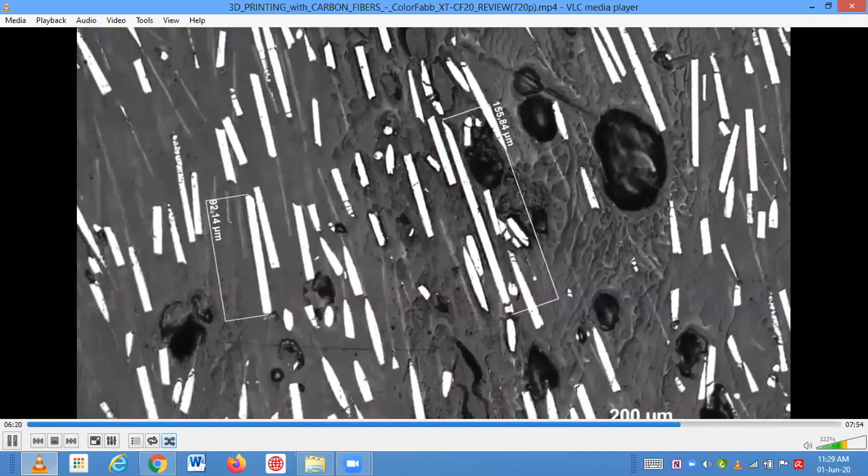I've been mentioning safety concerns in the beginning. This material is filled with lots of very tiny fibers, which might come loose during printing, cleaning, or reworking. I wasn't really feeling comfortable printing XT-CF20 in my office, and when reworking this material, which by the way works very well, a respirator is definitely a must.

I don't know if I'm overcautious, but I have a bad feeling having these particles in my office. What do you guys think?

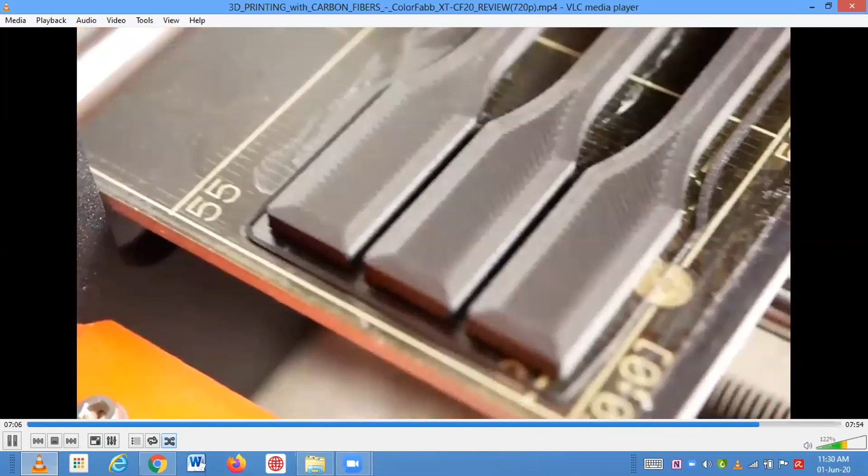All in all, it was very interesting for me to work with ColorFabb's XT-CF20. It requires some special setup due to the special nozzles needed, but delivers stunning looking parts. Overall, strength was only okay, but the stiffness of the material really stands out. If you need a material that is different from most other materials, this is definitely not a bad choice. If you require only strength and toughness, there are other materials around that might be more suitable.

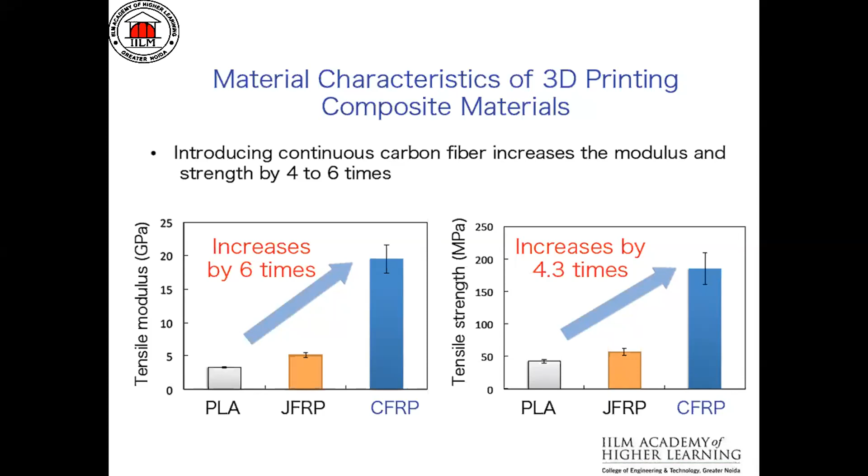So now I want to discuss the application of composite materials. Okay, now start discussion about application of composite materials. So these are the composite materials which have various applications, like carbon fiber and its application, fiberglass and its application, fiber reinforced concrete and its application, laminated floors, bulletproof glasses, modern light armors, aerospace application, construction application.

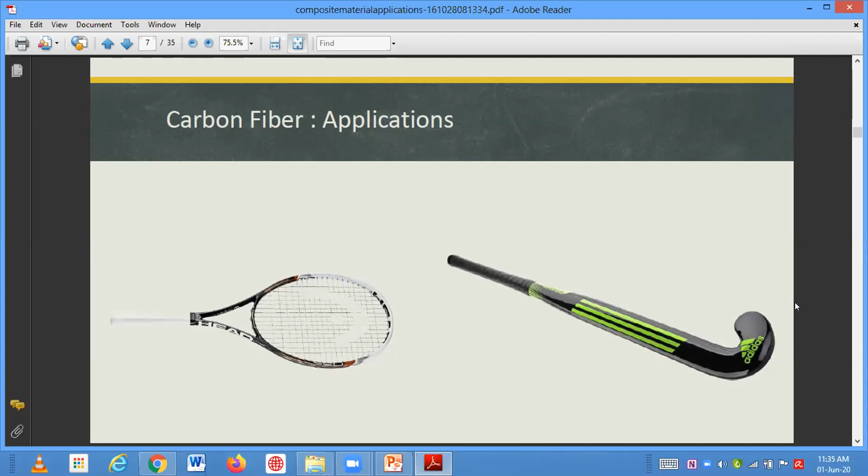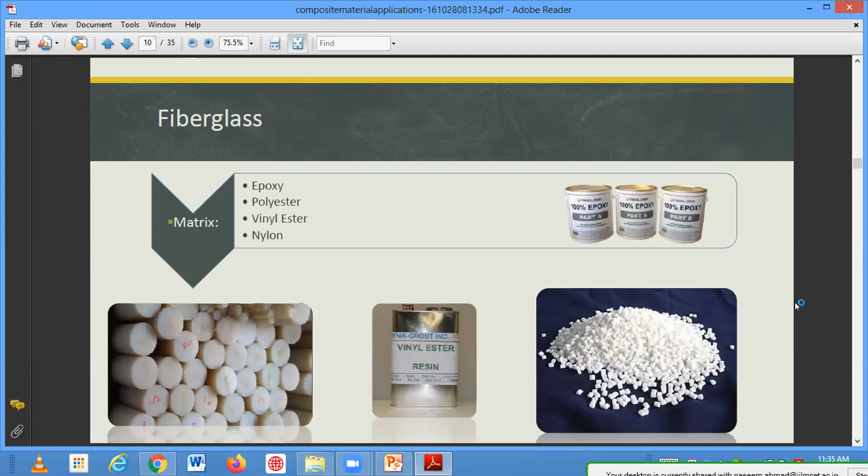In fiberglass, the base material means matrix is also same, which is used in carbon fiber and for plastic - epoxy, polyester, vinyl ester, and nylon. And here the reinforcement is glass fibers. Aur jo kisse bana hoga, ya to silica se bana hoga, ya oxide of calcium se bana hoga, magnesium se, boron se, kisi se bana ho sakta hai glass.

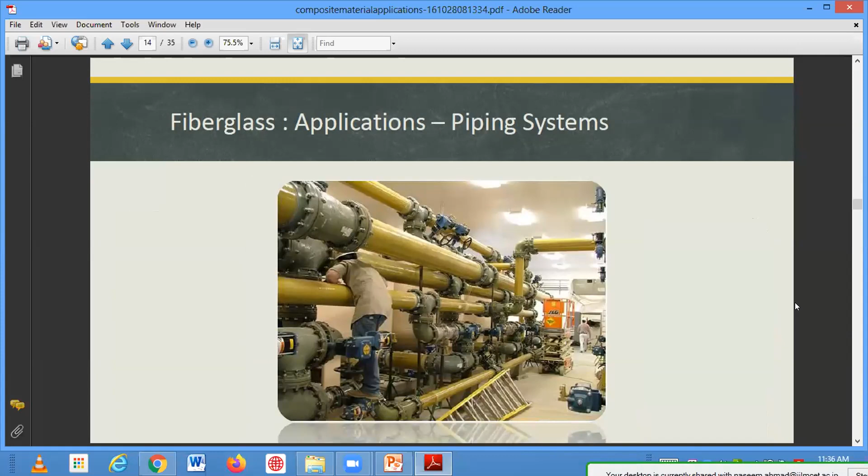इसके अलावा जो बाथ टब होती है दैट इज आल्सो मेड ऑफ फाइबर ग्लास। एंड दिस इज द पाइपिंग सिस्टम। सो जो भी पाइपलाइन वगैरह अगर हम यूज करेंगे तो वहाँ पे भी फाइबर ग्लास का यूज कर लेते हैं। एंड जो स्पोर्ट्स में आपके हेलमेट्स हैं वो भी यूज होते हैं

सो बेसिकली इस टाइप के ग्लासेस में नंबर ऑफ लेयर्स इंक्रीज कर देते हैं। सो दैट इज सेम एज ए कंपोजिट मटेरियल। सो एक ग्लास की लाइन लगाई, फिर अनदर मटेरियल यूज किया, लाइक जैसे पॉलीकार्बोनेट यूज कर लिया, फिर ग्लास, फिर पॉलीकार्बोनेट। तो जितनी नंबर ऑफ लेयर्स हम इंक्रीज करेंगे उतनी ही ज़्यादा उस ग्लास की स्ट्रेंथ बढ़ती चली जाएगी। तो जो हम बात कर रहे हैं कि दिस इज वर्क एज ए बुलेट प्रूफ, सो उसको हम यूज कर सकते हैं।

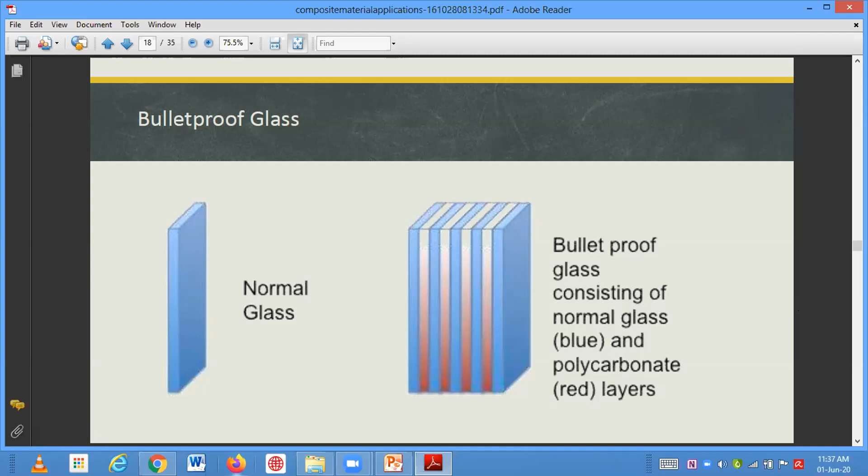नाउ नेक्स्ट वन इज दिस वन, यहाँ पे देखिए आप, जैसे सिंगल ग्लास है तो आसानी से ब्रेक हो जाएगा, बट अगर हमने कंपोजिट मटेरियल प्रिपेयर करा लाइक ग्लास फाइबर से, सो वो इतनी आसानी से ब्रेक नहीं होगा। अगर वो फर्स्ट फ्रंट का भी ग्लास ब्रेक कर लेता है तो उसके बाद नंबर ऑफ लेयर्स हैं तो वो इतनी आसानी से ब्रेक नहीं होंगी। बुलेट प्रूफ की तरह काम करता है।

जो बुलेट प्रूफ हमारी जैकेट होती है वो भी प्रिपेयर होती है। उसका मटेरियल, the bulletproof vest consists of a panel, a vest-shaped sheet of advanced plastic polymer that is composed of many layers of either Kevlar or Spectra Shield. That is the material which insert the layer of woven Kevlar are sewed together using Kevlar thread, and while the non-woven Spectra shield is coated and bonded with resin such as Kraton.

Now another is army application, bulletproof vest. This is the procedure for prepare the bulletproof vest. So you can study to make a Kevlar, the polymer poly-paraphenylene terephthalamide. This is the material which is used. It must first be produced in the laboratory. This is done through a process known as polymerization.

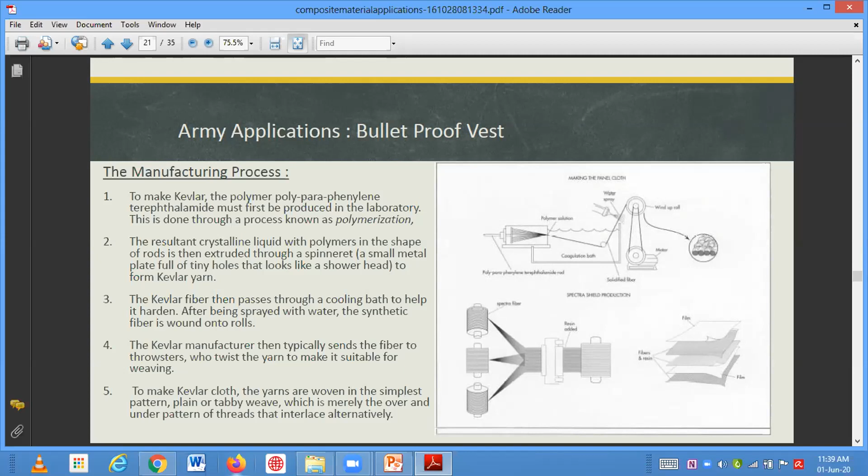तो पहला प्रोसेस क्या होगा इसका प्रिपेयर करने का? Polymerization. Now next one is the crystalline liquid polymer in the shape of what is then extruded through the spinneret. So you can read out. This is the procedure for prepare the bulletproof vest. And now this is another army applications.

तो इसका जो temperature है वो -196 सेंटीग्रेड तक जा सकता है। हाई टेंसाइल स्ट्रेंथ टू वेट रेशो होता है, मतलब वेट इसका कम से कम हो सकता है बट स्ट्रेंथ इसकी ज़्यादा होती है। और स्टील से 5 टाइम्स स्ट्रॉन्ग होता है। और अगर कोई डिफरेंट केमिकल अटैक है उसको भी रजिस्ट कर सकता है। इवन जो कोरोजन का इशू आता है वो भी प्रॉब्लम नहीं होगी। और डिसएडवांटेज ये है इसका कि इसकी जो कंप्रेसिव स्ट्रेंथ है वो बहुत कम होती है।